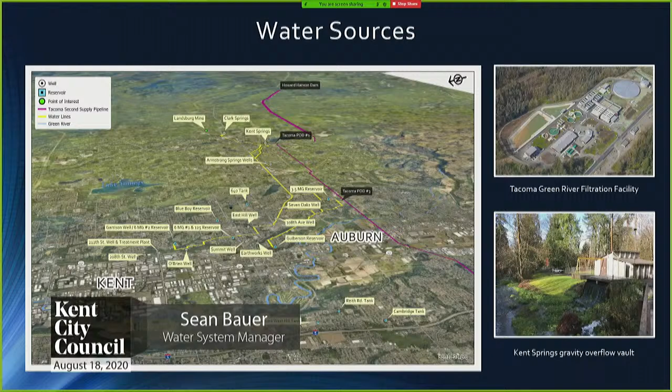Our water supply this year continues to be strong. For our groundwater sources, groundwater recharge started out slow in the fall of last year through January of this year with below normal precipitation, but rebounded nicely with above normal precipitation in February and pretty much up until early summer.

For our Tacoma Green River supply, snowpack was about 90% of normal this year, but the Corps did reach full storage behind the pool on May 31st. So we began using the stored municipal water behind the dam on June 30th, when the minimum river flows were reached on the Green River at the Palmer Gauge near the Tacoma Treatment Facility.

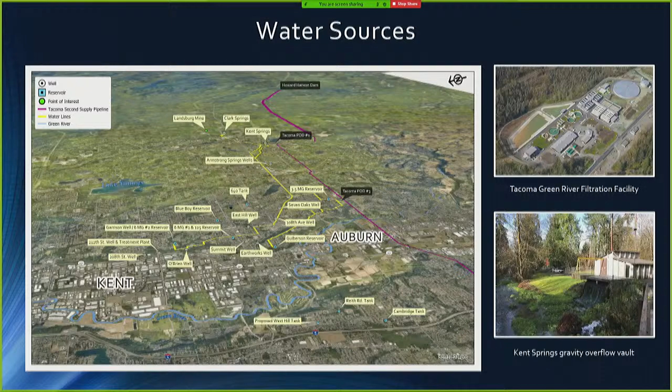When I'm talking sources, I'd like to take the opportunity to invite any of you that haven't toured our eastern sources or any of our water facilities, please let us know and we can get something set up for you. It's something neat to see.

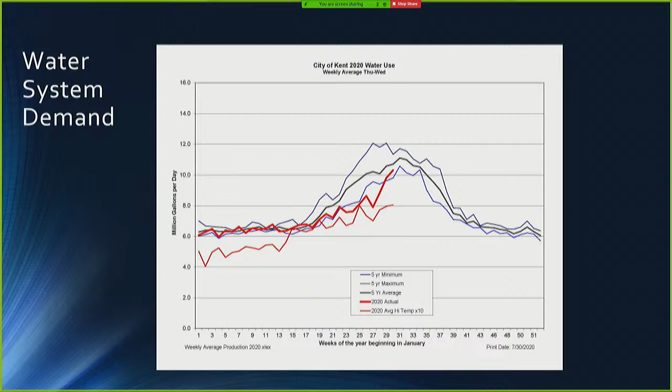With the cooler, wet weather, it took a while for demand to increase this summer. We were actually below our 5-year minimum weekly demand for about 6 weeks up until recently, and are now tracking just above the 5-year weekly minimum.

The Howard Hanson Dam additional water storage project has been a topic of many water system updates, but there's finally a light at the end of the tunnel, so to speak. Mike Mactutis and the environmental engineering section have given many presentations on Howard Hanson for flood protection, but I thought I'd note that we are the only municipality on the Green River that uses the dam for both flood protection and drinking water supply.

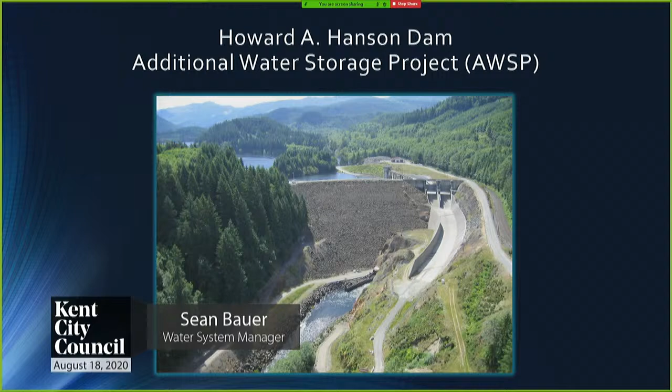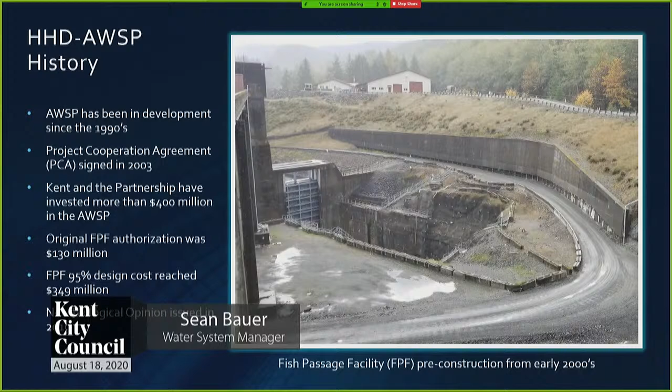The Additional Water Storage Project, or AWSP for short, was authorized by Bill Clinton in Congress in 1999. The project was authorized in 2 phases. The first phase is authorized for the storage of 20,000 acre-feet of municipal and industrial water, and the second phase for an additional 12,000 acre-feet of storage to be used for both ecosystem purposes and municipal and industrial storage.

In 2003, a project cooperation agreement was signed by the Corps and Tacoma Public Utilities, which included a cost allocation for the project of 1.6%. This means Tacoma, as the non-federal sponsor, is responsible for 1.6% of the project cost and operations and maintenance. As partners with Tacoma in the regional water supply, Kent is responsible for 22% of Tacoma's 1.6%.

Phase 1 of the AWSP included projects for ecosystem restoration both above and below the dam, a fish trap and haul facility to move fish above the dam, and a fish bypass system to safely pass juvenile fish and adult steelhead downstream through the dam. Ecosystem restoration and the fish trap and haul facility were all completed, but the design for the fish bypass system reached $349 million, which exceeded the authorized amount of $130 million, so the project was paused.

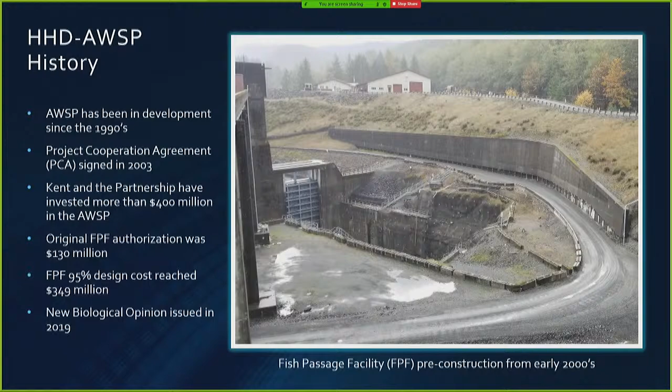On Valentine's Day in 2014, the Corps and NOAA restarted formal consultation on Howard Hanson operations and the ESA impacts on the dam. NOAA issued a new biological opinion in 2019. The result of the biological opinion was an ESA listing for salmon, steelhead, and the impacts that Chinook salmon have as a food supply for southern resident orcas. The biological opinion required downstream fish facilities to be constructed by the end of 2030 and in operation by 2031.

Some of the interim target dates are to complete a Department of Army approved post-authorization decision document by 2024. The Corps has received $3 million in their 2020 work plan to take the next steps to restart downstream fish passage work. They plan to initiate pre-construction, engineering and design, or PED, by 2025, assuming it receives congressional authorization and appropriation.

Completing the PED by the end of 2027, construction completion by 2030, and begin passing salmonids by 2031.

Prior to the downstream fish passage system becoming operational in 2031, the Corps is managing peak flow events to protect fish spawning beds downstream of Howard Hanson Dam. They're working with Tacoma and federal, state, local, and tribal stakeholders to identify opportunities to better manage flows during juvenile salmon migration, which occurs in the spring when the dam is refilling.

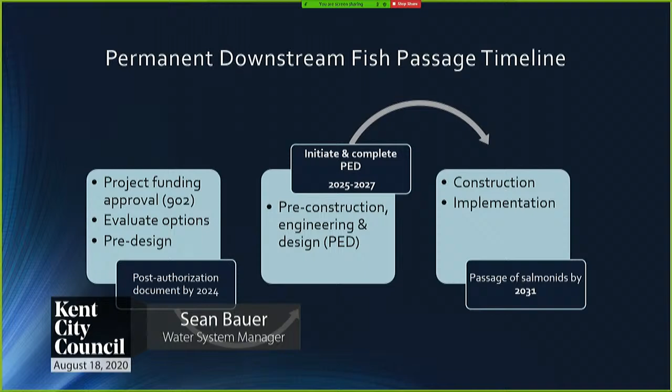When phase 1 is complete, phase 2 can occur.

Water quality: the city's annual water quality report was completed in early June this year and is once again available electronically to all residents and customers. A postcard was mailed to every resident or business within our service area, directing them to the city website where the report can be viewed, downloaded, or printed. In addition, we printed about 500 copies to have available on request and to post at various city facilities such as Commons, the Senior Center, Centennial, places that are closed right now.

On the subject of water quality, I'd like to note that the COVID virus has not been detected in drinking water supplies. Based on current evidence, the risk from drinking water is low, according to the Environmental Protection Agency. So your water is safe to drink.

We've talked about lead in the past. The city continues to meet the requirements of the lead and copper rule. Our last round of sampling occurred in 2018, and we will sample again next year in 2021. The highest lead level detected in sampling was less than 1 part per billion, and the action level for lead is 15 parts per billion, so we're well below the action level. For copper, the highest detection was 0.12 parts per million, and the action level is 1.3.

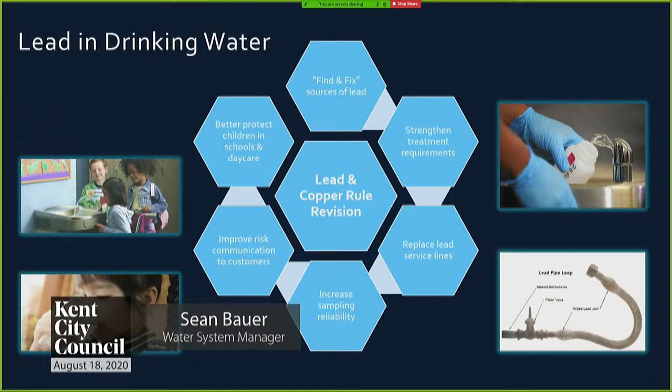There is a lead and copper rule revision underway that will impact us slightly. One of the rule revisions is for water utilities to test all schools and daycares within their service area over a 5-year cycle. Currently, schools are responsible for their own testing and have higher acceptable lead levels. They're also looking at some sample collection technique changes.

This is a fun one to say. Polyfluoroalkyl substances, or PFAS as they're called, are a group of chemicals used in the manufacturing of a variety of products, like Teflon in non-stick cookware, water repellent clothing, and some firefighting foam. PFAS have mostly been detected around military bases and fire training facilities.

The state is working on rulemaking to set a state action level that would be in effect until the federal government finalizes a national rule with a maximum contaminant level allowed. A maximum contaminant level, or MCL, for a contaminant in drinking water is set by the federal government. States can then take what is called primacy of the rule and set tighter restrictions, but they can't be less stringent.

The state is looking at setting an action level for PFAS at 70 parts per trillion. We tested for these substances back in 2013 and 2014, and none were detected. However, this new rule that's coming out has a detection level lower than what we sampled for. I still think we'll be fine.

America's Water Infrastructure Act: in October of 2018, President Trump signed the America's Water Infrastructure Act. While most of this law upgrades water resources or flood control infrastructure, more than 20 sections update the Safe Drinking Water Act. One provision of the act concerns emergency response and resiliency for drinking water systems. We are currently working on a risk and resiliency assessment for the water system for malevolent acts such as physical and cybersecurity threats, and natural disasters such as earthquakes, fires, and storms.

Landsburg Mine: last year, the mine site waste areas were backfilled with verified clean material that came from the Microsoft campus project. This year, they're working on capping the material with an impermeable geomembrane cover and installing gravel-lined storm water diversion ditches to discharge surface water off the site to the north.

1,4-dioxane continues to be detected in samples from the north portal wells of the mine. Ecology is asking the potential liable parties to increase their frequency of groundwater sampling from the northern portal wells and to work on connecting the contingency discharge pipe from the north contingent treatment pad to the Soos Creek sewer line. Ecology and the potential liable parties continue to work on a long-term solution for treating the 1,4-dioxane at the north portal.

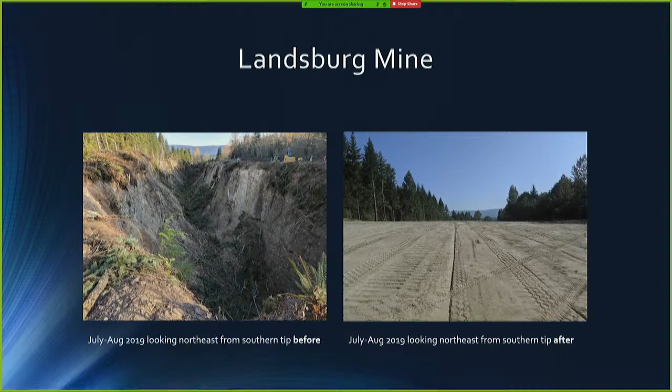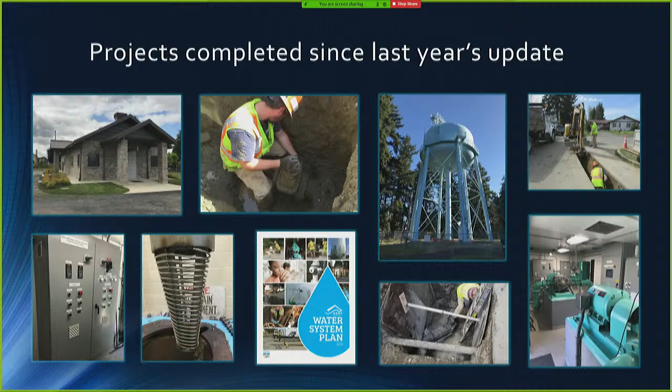There's been quite a few projects completed since last year that I'll go over next. This is the fun part of the presentation, to show progress.

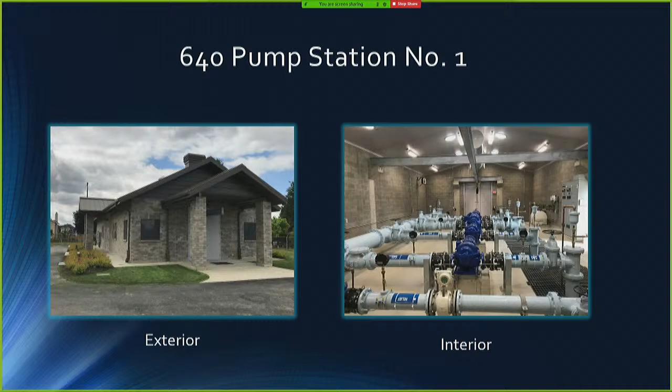Construction of the 640 pump station was completed in March of this year. This $3.5 million facility is the final piece needed to implement the northern portion of our new 640 pressure zone on the East Hill, which I will talk more about in a moment. The pump station contains two daily demand 20 horsepower pumps capable of 600 gallons per minute each, and two high flow 125 horsepower pumps capable of 2,250 gallons per minute for fire flow.

Pump Station 3 is at the bottom of Reith Road on the West Hill and provides the first step in water supply for the West Hill. The pump station was originally built in the 1950s and was in need of an electrical upgrade. The station had a generator for backup power, but didn't have an automatic transfer switch for when the power went out, meaning a water staff member would have to travel to the site and manually switch over to backup power. With this project, we added that automatic transfer switch, so in a power outage event, the power transfers automatically. In addition, a new service entrance, motor control panels, variable frequency drives for motor control, and programmable logic controllers were installed. With the new VFDs, we now have the capability of running the station in pressure sustaining mode when we take Reith Road tank offline for repairs or service.

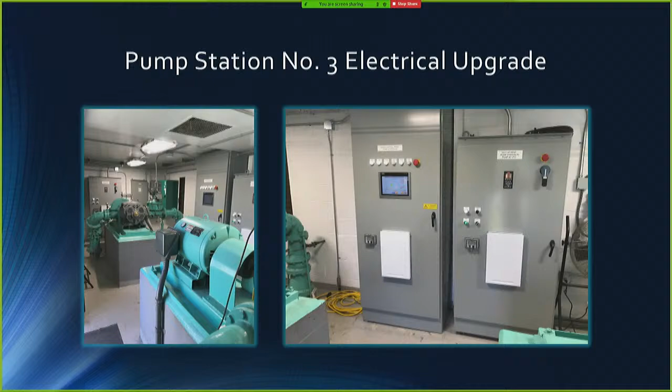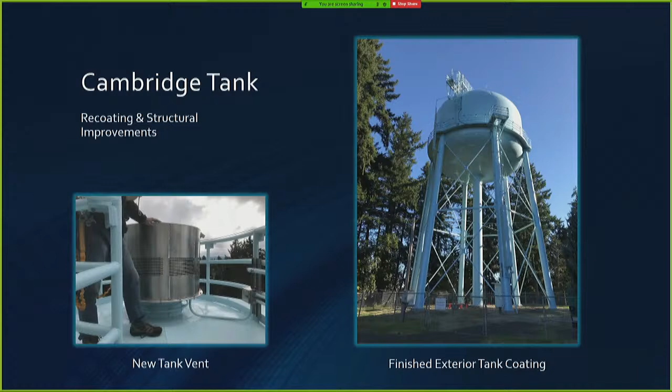Cambridge Tank: recoating of the interior and exterior of Cambridge Tank on the West Hill was completed. In addition to the paint coating being in bad shape, there were needed structural improvements for both employee safety and security. This project included a retrofit of the access ladder, a landing at the top for employees to safely step off and exit the ladder, improvements to the upper platform, a wider platform around the tank, a new tank vent that protects the water in the tank from the outside environment, and a new fall restraint system for employees.

We wrapped up our water system plan renewal late last fall, but it took a while to get through King County's approval process, and then COVID-19 happened. The final approval from the Department of Health was received on July 9th, so our next 10-year plan will be due July 10th of 2030.

In developing the plan, we looked at our water supply, current and projected water system demand, projected growth, land use, financial analysis, and our infrastructure. Although it's a 10-year plan, it looks at capital projects 20 years out and beyond at a cost of about $168 million. Projects range from water main replacements, reservoir maintenance and replacements, pump stations, completing the 640 pressure zone, and our capital commitment to the Tacoma Regional Water Supply System.

For water supply, the plan looks out 50 years, and we have sufficient supply to meet our projected demand.

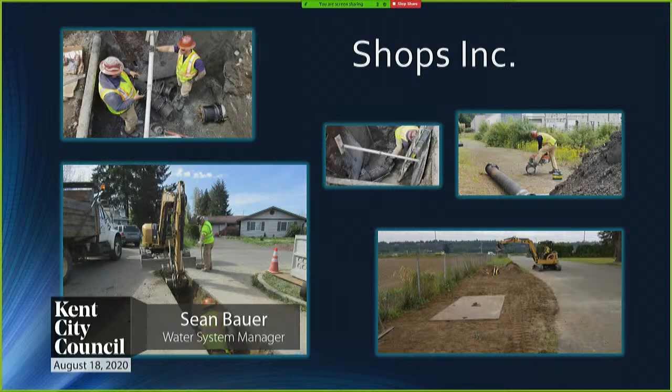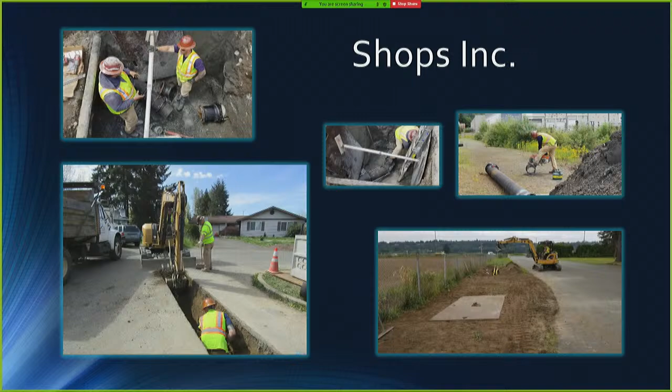There are 287 miles of pipe and transmission main in the distribution system. 72 miles of this pipe is 55 years old or older. We continue to replace water mains in-house through our Shops Inc. program. Staff typically complete 6 to 8 water main replacement projects per year, depending on the length and complexity, and the work is cost effective at about $147 per foot versus $317 per foot for contracted replacement projects.

Last year, we completed an electrical upgrade and generator replacement project at our Kent Springs source. This year, we upgraded the programmable logic controller and the programming. This was a project done with a combination of in-house SCADA staff and our integrator GoTech.

Our goal is to clean and inspect 2 well sources and their pumping equipment per year. We recently completed well number 2 out at our Armstrong Springs source in Covington, and we'll be moving on to well number 1 at the site next.

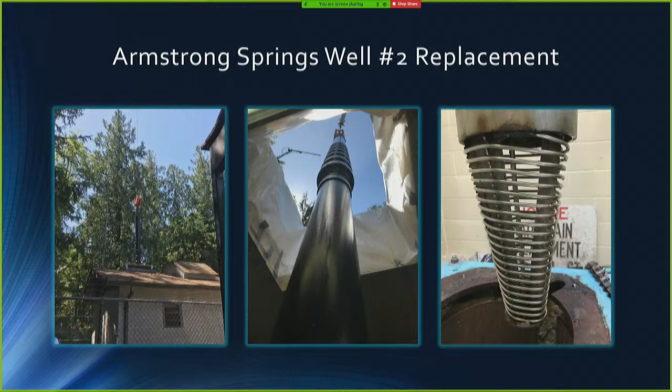Our Clark Springs Habitat Conservation Plan contains habitat conservation measures for stream augmentation or habitat restoration that need to be completed. The Habitat Conservation Plan protects our water right at Clark Springs for 50 years. The plan took us about 10 years to complete, and we are one of only 3 entities in the state that have one in place last I checked. Tacoma and Seattle also have a habitat conservation plan in place.

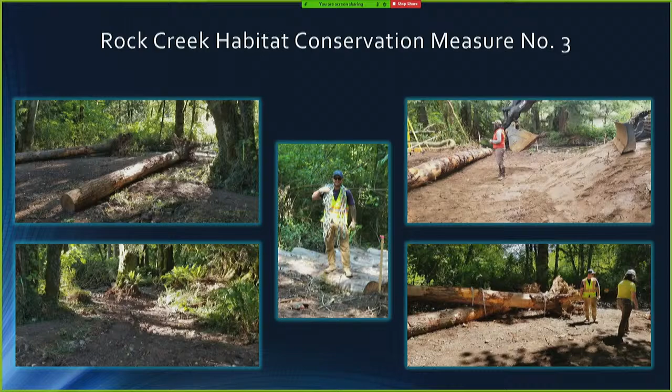Rock Creek HCM3, or Habitat Conservation Measure 3, was a wetland improvement and juvenile salmonid enhancement intended to connect a small wetland and pond immediately west of Reach 1 near the mouth of the Cedar River. This HCM is intended to make available off-channel rearing and flood refuge habitat that can be used by juvenile salmon. The project was completed by in-house water staff as part of our Shops Inc. program this year and wrapped up at the beginning of August.

So those were a highlight of some of the bigger stuff that was completed over the past year. So now we'll move on to some of the things.

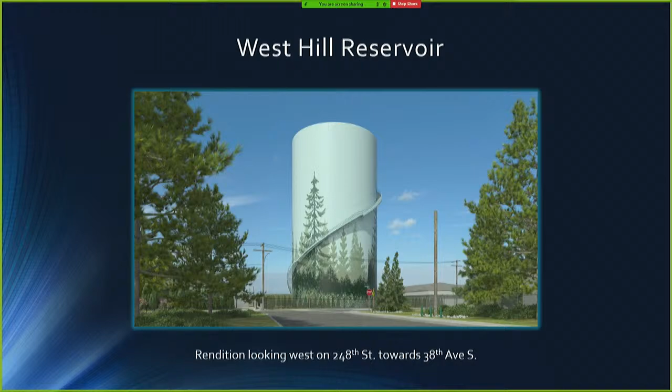The West Hill Reservoir is kind of a 3-phase project. In addition to the reservoir, a booster station and transmission main up the West Hill is planned as well. This will provide redundancy and efficiency for the water system. Currently, water for the West Hill is carried across the Meeker Street Bridge and pumped up the West Hill in stages. The Meeker Street Bridge doesn't meet today's seismic standards and isn't expected to fare well in an earthquake based on the seismic evaluation we performed on the water system.

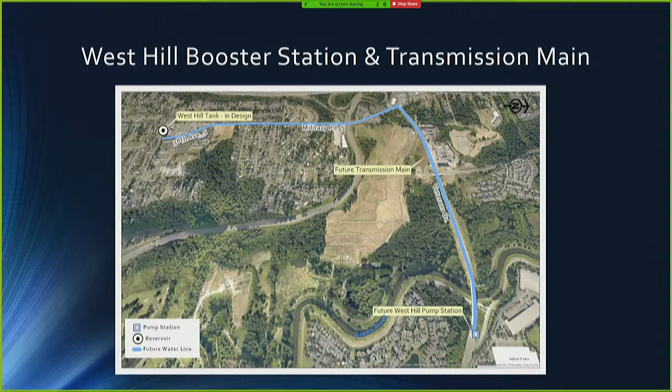The current operation of pumping up the hill in stages requires more equipment to maintain and added electricity costs. The new pump station that delivers water straight to our highest pressure zone to supply water to the tank, and then feeding water hydraulically back down the hill through pressure reducing valves, will save money both in electricity and equipment maintenance.

This isn't the final. The area encompasses the general area of 228th to the north and 256th to the south, and between 108th to the west and 124th to the east. The zone will be isolated and levels will be raised in steps and monitored. The overall process to reach the new full operating level will take about a month. There's nothing our customers need to do during this process but enjoy the new higher pressure.

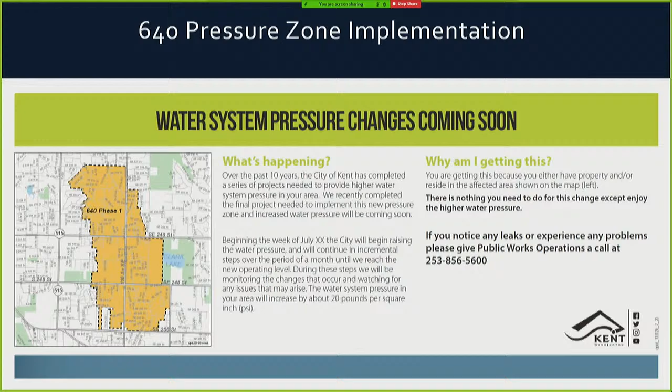Shops Inc. water main replacements are underway for the year, with projects on First Avenue South and on Fifth Avenue still to come. We replaced water main along with the 76th road raising project, and the water main portion is just about complete. And we just had a pre-con for the Reith Road water main replacement project on Reith Road between 42nd and 38th. That'll be adding a 16-inch main for better fire flow protection.

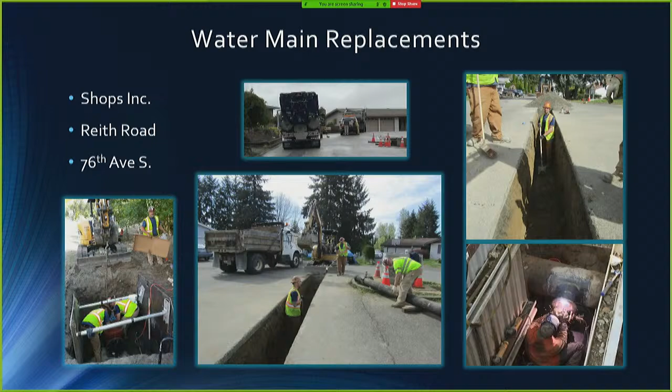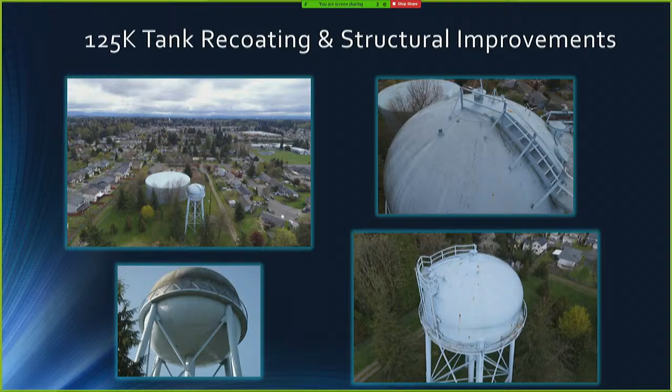Our 125,000 gallon tank, or 125K tank as we call it, recoating and structural improvement project is underway. The tank is located at our Pump Station 5 site on 98th Avenue, just north of Southeast 240th Street. The tank holds 125,000 gallons and supplies water to our 485 pressure zone. This project includes a new interior and exterior coating, security and access improvements for staff, a new roof vent, and a new safety harness system that staff attach to when climbing or maneuvering on the tank.

Our generator and electrical upgrade project out at Clark Springs goes to bid the end of September. The current backup power generator is undersized to provide a full system backup, so it's being upsized. The current generator is about 45 kW, and the new version will be 450 kW. The project also includes upgrades to motor control centers, automatic power transfer equipment, control systems, and motor drives.

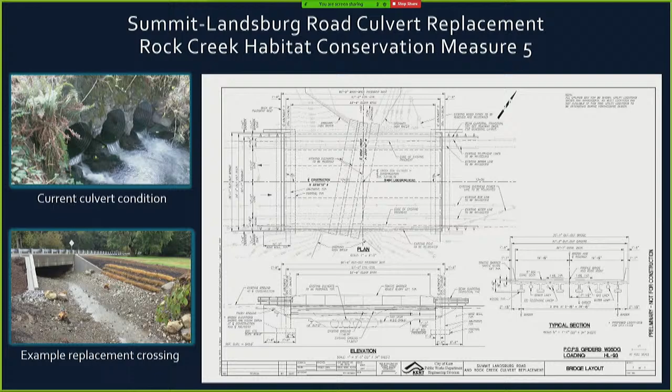State Route 516, the Jenkins Creek Road Widening Project, continues to move forward. This is a road project with the City of Covington and the Washington State Department of Transportation that will impact our transmission mains from Clark Springs, Kent Springs, and Armstrong Springs. 90% design should be out soon on that one as well. Construction is expected to take place in the summer of next year and is expected to take about a year to complete.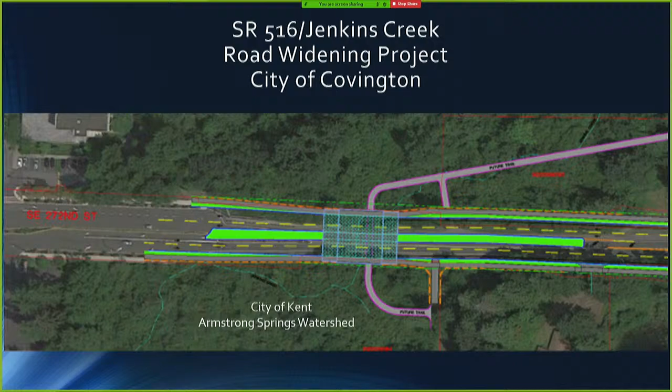During any water main outages, we will have workarounds with other water sources like our Tacoma Supply or in-town sources. So we have workarounds as they take these out to replace them, and we won't take more than one out at a time.

We continue to work our way through well pump and motor inspections as well, and cleaning. The well pump and motor are removed and rehabilitated or replaced depending on the outcome of the inspection. The well casing is TV'd or videoed to determine its condition and the method of cleaning needed.

In most cases, it's a simple brushing followed by bailing, which is a fancy name for pumping it until it's clean again. In some cases, the well may need a surging and chemical treatment, but we haven't experienced that yet. The wells have been in pretty good shape so far.

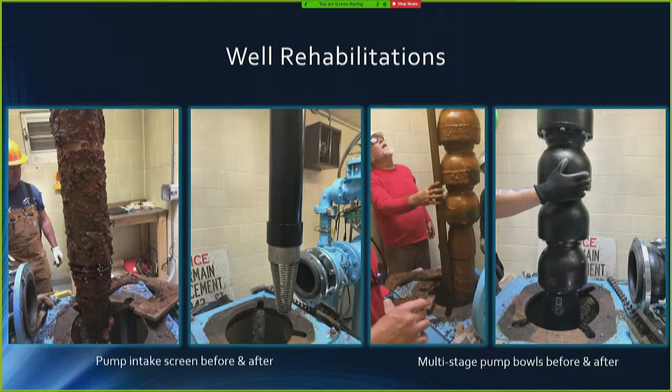The well is then videoed again to make sure the cleaning was successful, followed by installation of the rebuilt or replaced equipment. It is recommended to perform this rehabilitation every 15 to 20 years. With 16 well pumps and motors in the ground, it's pretty much a continuous cycle for us.

That was a snapshot of key things being accomplished or affecting the water system. There are many other projects happening in addition to maintenance activities, sampling, water treatment, things of that nature. So with that, I'd be happy to answer any questions you may have, and thank you again for your time today. And for the first time ever, I didn't exceed my time.

Thank you so much, Sean, for all of that great information. You're welcome to have all the time you need, but we appreciate you spending time with us today.

Great report. A lot of things that we've been able to get done, but a lot of good things we have coming up. I know Councilmember Fincher, you probably would agree, but looking at the picture of the Landsburg mine and how that's completely filled in is amazing. Yes, two of us had been there, I believe it was last year, and wow, they've done a lot of work there.

So it's always good to see how these things progress. So, really cool. Again, council members, if you have not had a chance to see any of these things that we have going on, I'm sure Sean would be happy to help you to see those or put you in touch with somebody that can make that happen.

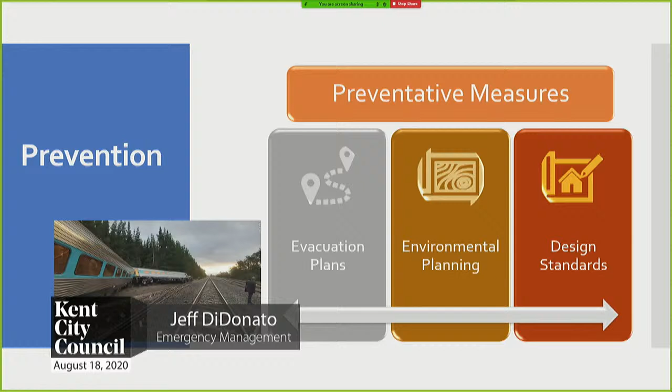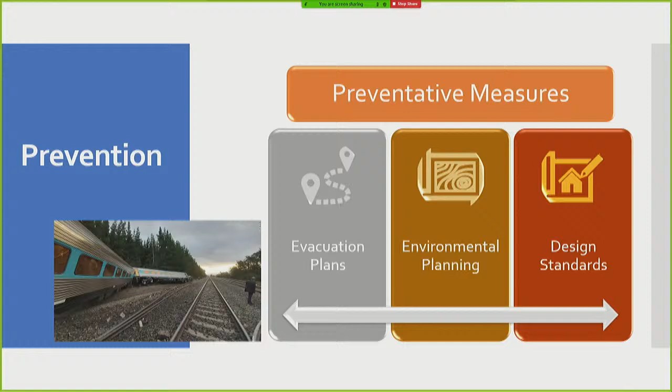So the first one is prevention. Prevention focuses on preventing human hazards, primarily from potential natural disasters or terrorist attacks. Preventative measures are designed to provide more permanent protection from disasters. But as we know, not all disasters can be prevented. The way we limit the risk of loss of life and injury is through the development of good evacuation plans, environmental planning, and design standards.

Preparedness is next, and that's a continuous cycle of planning, organizing, training, equipping, exercising, evaluating, and taking corrective action. This is really where we spend the majority of our efforts and time, and our work is focused on updating the plans and then exercising them. Training and exercising plans is really the key to preparedness.

Some of the main plans and grants that we maintain are the Comprehensive Emergency Management Plan, the Hazard Mitigation Plan, the Emergency Coordination Center Standard Operations Procedures, Continuity of Operations and Continuity of Government, and the Emergency Management Performance Grant.

In terms of community outreach and education, this includes our CERT classes and training, our community events like Cornucopia Days, and presentations to groups like homeowners associations.

And then the supplies and equipment that we prepare: we have some personal protective equipment that we keep on hand, MREs and water for the ECC staff and public works operations, 3-day comfort kits for city employees. We have a communications van, shelter trailer, generators, and other supplies and equipment.

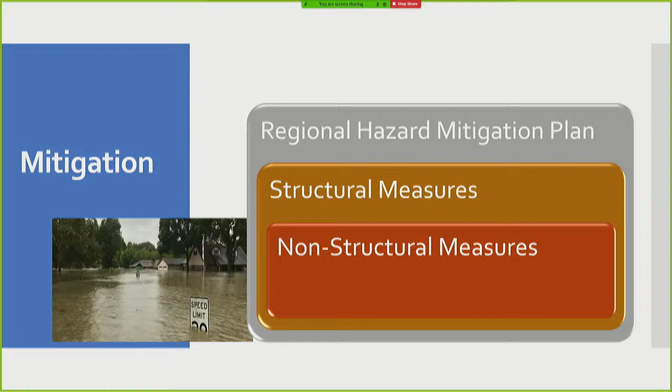Non-structural mitigation most often entails adopting or changing building codes. In fact, as you know, you just recently adopted an update to our regional hazard mitigation plan. So that's the example of mitigation.

Next is response, and that is comprised of coordination and management of resources, including personnel, equipment, and supplies. This is where we activate the ECC, the Emergency Coordination Center, to an appropriate level. We'll discuss this in further detail on later slides.

And lastly, there's recovery. Recovery consists of those activities that continue beyond the emergency period to restore critical community functions and begin to manage stabilization efforts. The recovery phase begins immediately after the threat to human life has subsided, and the goal of the recovery phase is to bring the affected area back to some degree of normalcy.

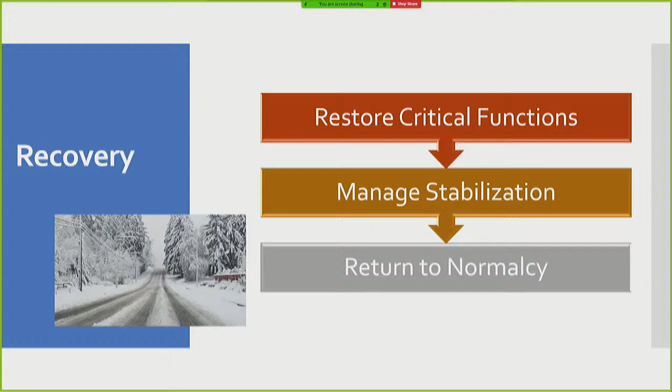Although it's not a typical disaster situation, we are currently heavily involved in recovery with COVID right now. That includes coordinating reimbursement money through FEMA and other sources, coordination of recovery activities to restore our critical functions and bring stabilization to a very difficult and unprecedented time. We're also assisting with the logistical challenges of scarce resources, such as personal protective equipment.

So legal authorities that authorize and obligate our city to provide emergency management include RCW 38.52.005. This law directs cities to establish an emergency management organization. That is done through our Kent City Code, which states: pursuant to this, hereby established in the city an emergency management organization for the purpose of performing emergency services functions in support of city operations. That also designates the fire chief as the director of emergency management.

That is established through the interlocal agreement with Puget Sound Regional Fire Authority, which outlines the roles and responsibilities and the level of emergency management services that will be provided from the RFA to the city.

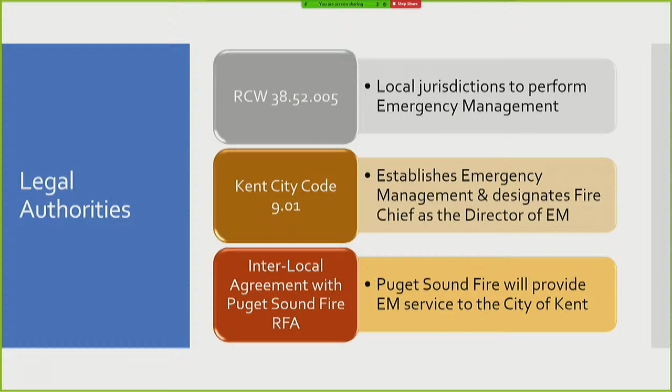So those roles and responsibilities include these as the main topics that we do. Obviously there's more, but the management of plans and grants, as we touched on before, includes the Emergency Management Performance Grant. This year, for instance, that grant is being used to update AV equipment in the classrooms at the police and fire training facility at Station 74, as well as updates to the ECC technology that are there also.

The ECC includes the functionality of the ECC itself, so that's the technology - much of what we're using those grant dollars for this year. It also includes training the red and blue teams that will staff the ECC in a disaster, made up of Kent staff that are used during a disaster, coordinating and facilitating during a disaster. This includes setting up the ECC and then the management of the red and blue teams during that.

In addition, the employee education and training is not only for the ECC, but it's also the ICS and understanding ICS, the NIMS training that I believe you've been involved in to a degree. It also includes managing volunteers, which we'll cover in the next slide, community education and outreach, which we've talked about - the Cornucopia Days - and then recovery management, which we also discussed.

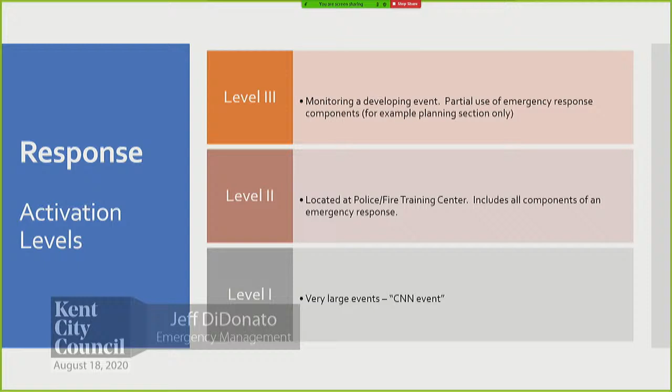Now we'll talk about response. In the response phase, that's triggered by the activation of our Emergency Coordination Center, the ECC. There are three levels of activation, and it depends on the situation and the need for coordination and support. Level 3 is the lowest level of activation, and that takes place in the Centennial Center on the 4th floor in our offices, where we're able to manage that smaller incident.

We have the technology there to manage that, and that's really where one or more department operations centers have activated and request assistance - a major regional event has occurred. That could be like COVID, or an event in a neighboring city, a significant local or regional event like a snowstorm or flooding, or an extreme weather warning is broadcasted and we're anticipating a need.

So when we step up to level 2, that's where we move to the Police Fire Training Center - for both level 2 and level 1 - and use the classrooms and conference rooms there. Level 2 is really where there's a strong potential that a department attempting to control an emergency will exhaust its resources before bringing the emergency under control.

Then level 1 is really where a state of emergency has been declared. County, state, and federal assistance is required to deal with an emergency of such magnitude that local resources, including mutual aid assistance, are insufficient to adequately respond. Those are the very large events, the CNN events, so they don't happen very often.

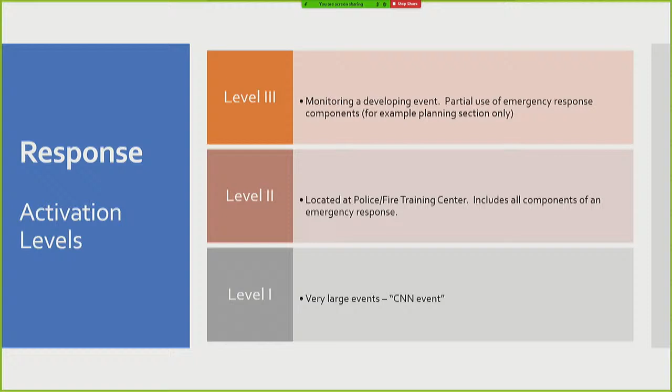So what do you do as council members during the response phase of a disaster? There's basically a small ICS structure where you are the policy group above the ECC, and your role is to establish policy in collaboration with the mayor.

This is right out of the basic plan of the Comprehensive Emergency Management Plan: establish policy, maintain normal council activities as appropriate under Kent Resolution number 1516, adopt and enact emergency ordinances, resolutions, and appropriate revenue to meet emergency needs before, during, and after an emergency or disaster. Then, upon request of the mayor or the director of emergency management, host and accompany visiting governmental officials on tours of the emergency or disaster area.

The last one is really separate from the response phase, but that's participating in emergency management training, drills, exercises, post-incident reviews, and support of the Comprehensive Emergency Management Plan and its emergency support functions.

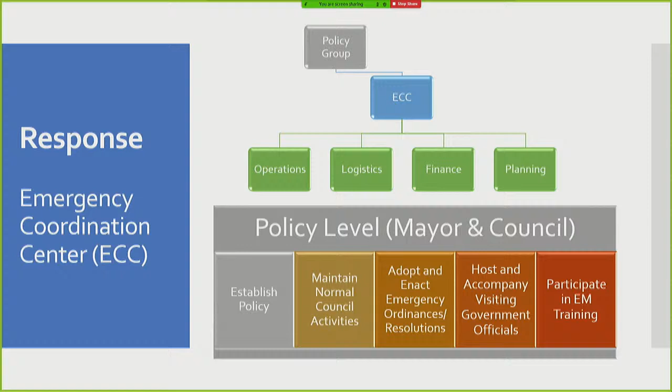When we talk about the different sections the ECC controls, this is straight out of NIMS ICS. The four sections we staff with our red and blue teams are: Operations, which collaborates with all of the department operations centers and coordinates response and recovery activities appropriate to disaster-generated demands. When multiple incident command posts are established, the operations section can also serve as an area command.

The logistics section is responsible for providing necessary supplies, services, equipment, facilities, and personnel for the event. Finance and administrative section is responsible for keeping records of financial and employment activities, clerical support where needed, contracts, payment of goods procured by logistics, cost accounting, and overtime of workers. This section also works with responding agencies in documenting disaster expenditures and costs.

Lastly is the planning section, a big section because they collect, analyze, display, and disseminate information regarding the incident. They develop recommendations for the incident action plan, direct planning meetings, and produce required situation reports for the ECC and other jurisdictions. Planning is responsible for knowing what has happened, what is happening, and what is going to happen, otherwise called situational awareness. This section advises the ECC emergency manager on needed resources, damage assessment, priorities, and future needs.

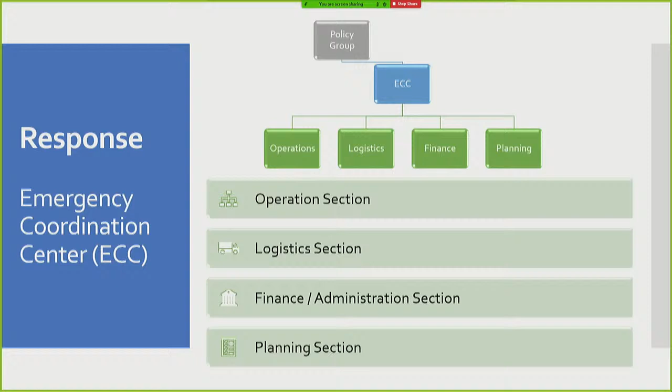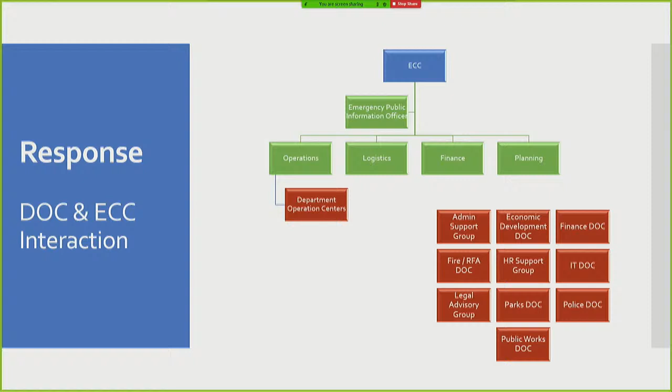The last thing is coordination between department operation centers and the ECC. Most departments within the city have a department operations center that will conduct disaster operations, and some departments have support advisory functions. Department roles and responsibilities are all identified in the Comprehensive Emergency Management Plan, and that coordination of operations happens at the ECC.

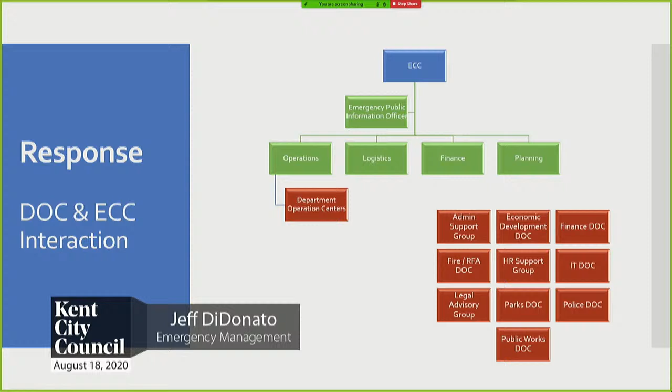For instance, let's say we have a snowstorm - the Public Works DOC will activate as they deal with the snowstorm, and we will activate to a level 3 ECC and support their needs, be it more sand or any other kind of resources. So anytime one of those DOCs listed in red is activated, we will activate our ECC to a level 3.

When we are no longer able to get resources through established mutual aid agreements, or a broader regional need to coordinate resources is apparent, that's when we can request assistance or resources from King County Emergency Management. If King County Emergency Management isn't able to fill those requests, it's forwarded on to Washington State EMD. We work closely with those folks.

We're working on doing that coordination training. We had big plans for this year with the complex coordinated terrorist attack drill, to be accomplished this year, but that has been thwarted so far by COVID.

So what can you do now as council members? One thing we say in emergency management is if you want to help the city during a disaster, you have to be prepared at home. Important things to have in place include a family disaster plan, which includes a communications plan for how we connect with our household through out-of-area contacts or meeting locations, developing a disaster kit, being prepared at home to live for 2 weeks without any government support, and knowing your role and what's expected of you.